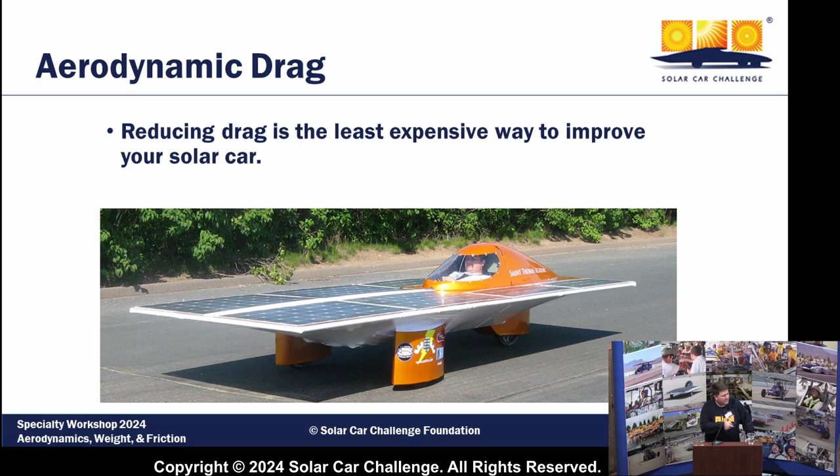These make a big performance change on your car.

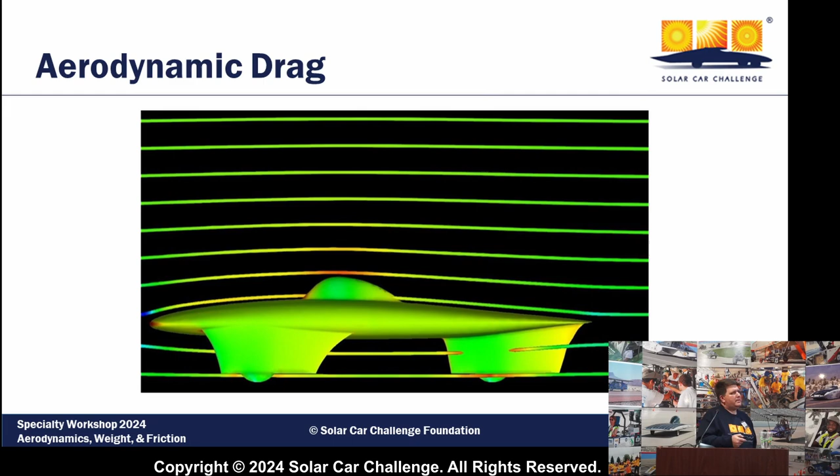So this is just one example of that. Some people will actually go and do some modeling on it. Do you have to do this? Not necessarily, but there are some guides you can look at. These come out of some of the engineering textbooks that you can find. If you find a book on fluid dynamics, you can find all sorts of gold like this.

Basically, drag always starts at the back of the vehicle, hence the name drag. It's a result of the unstable air as it wraps around whatever object is there. So you can see with some of these shapes, you actually get a smooth, what they call laminar flow, which means the air basically stays in line instead of going crazy all over the place, like these little swirls back here. So this is called laminar flow, where the air smoothly directs around it.

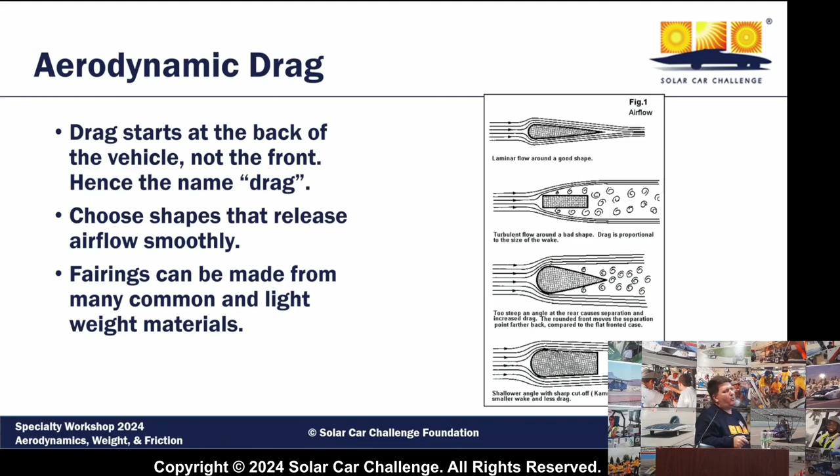When the air stays in line like this, it doesn't eat a lot of energy. When the air starts spinning in circles, you have to spend energy to make each one of these circles, which is why you have drag. That's all the extra energy because this is all turbulent and you're disturbing all of the flow of the air.

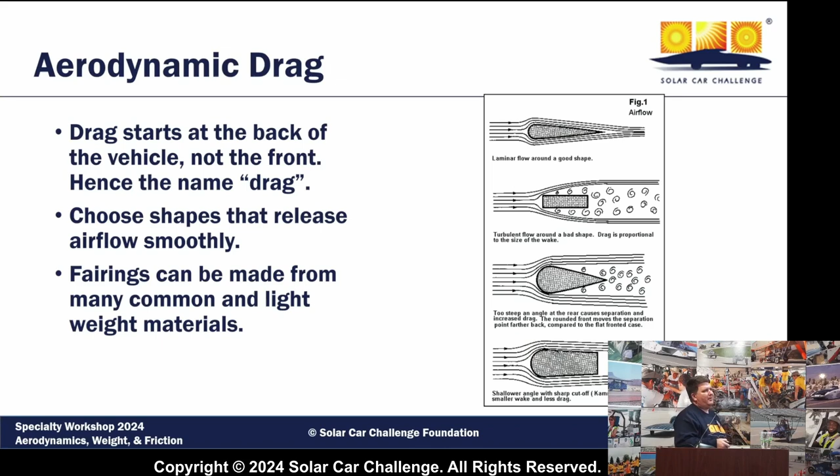So here we can see a couple different examples of shapes, and I'm not going to go into more specific details on this, but you want to choose shapes, if you're thinking about the overall design of your car, that will let the air release smoothly behind it without creating these vortices, eddies, and turbulent air behind it. Fairings are a very simple way that you can reduce some of the drag on your car.

More examples of shapes. Here you go with another set of things where you can look at the different shapes and the drag coefficient. The higher the number, the more drag that shape has. So just something to take away. Again, you can go into a fluid dynamics textbook, a mechanical engineering handbook, and find examples of this. Or, let me get with the digital age, you can Google most of this.

But this gives you an idea relative to things. It's like, well, if I just stick a giant cube in an airstream, I'm not that efficient. If I get some sort of streamlined half body, a streamlined body like this elongated teardrop shape, it's like 5% the drag of sticking a cube flat in the air. That's why you see so many solar cars with these kinds of shapes. That's your takeaway—it's meant as a rough guide.

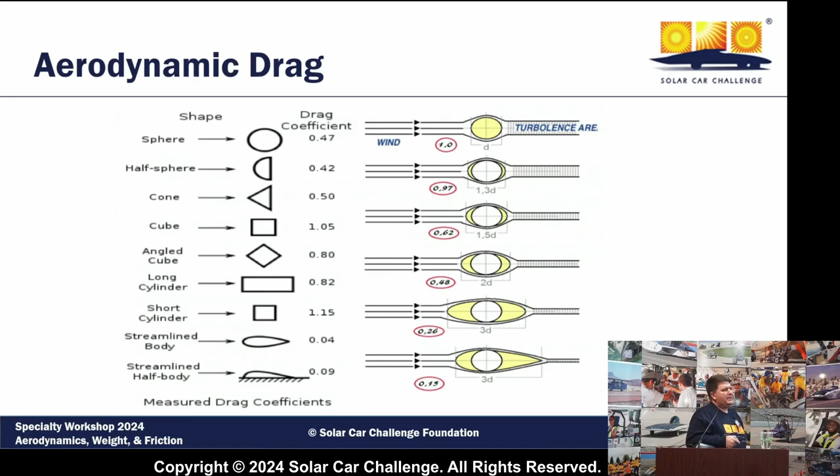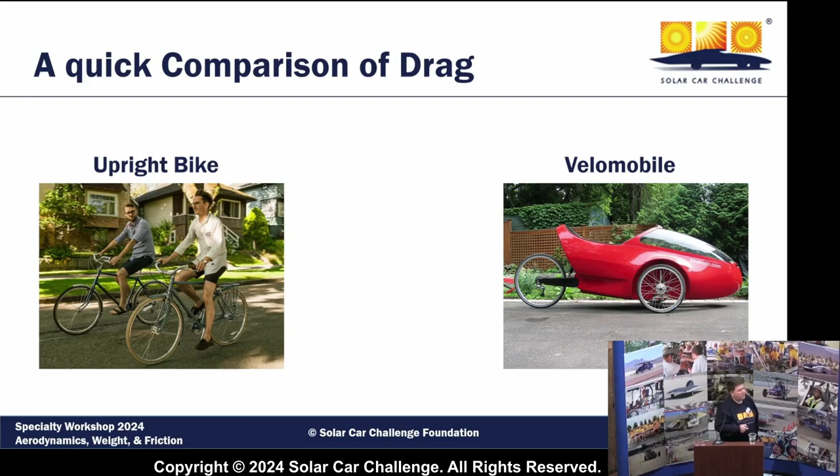Let's do a quick comparison of some drag. Let's look at an upright bike, random picture I stole from the internet, versus the velomobile. This is a human-powered vehicle that's meant to be super efficient, versus this, where I want to go ride by the beach and enjoy my afternoon, in a full upright position. Some actual numbers from that—let's take a look at it.

That's basically free energy that you're losing. All of this matters when you only get enough power to run a toaster off of your solar array. And by the way, even those really efficient solar arrays are only enough to run one of those 4-slot toasters, if you ever look at them.

I never realized how much power it takes to run a toaster, but there's my example for you. Just being upright in the air, you're losing a ton of energy. So just by being a little bit smarter about the shapes, you can save stuff. And that's only at 15 miles an hour.

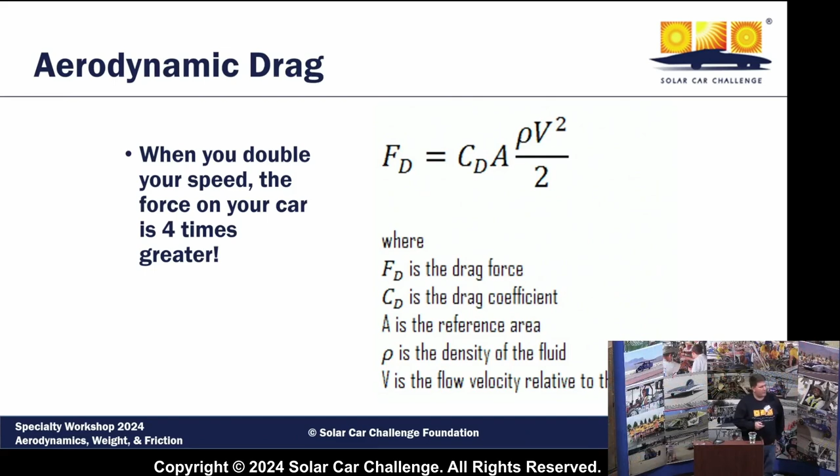How does aerodynamic drag work? Here's the formula for those of you interested in math. The takeaway, though, is it goes with velocity squared. So if you double your speed, you get 4 times the force, no matter what, holding everything else constant. So things to think about there.

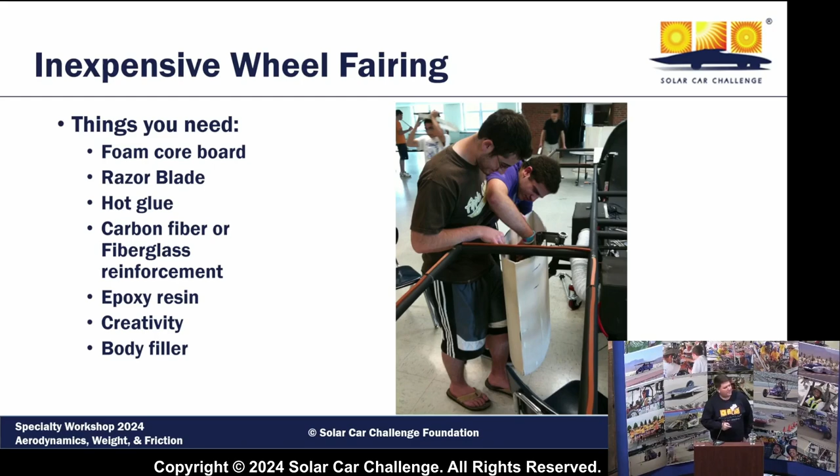You can then get a little bit of carbon fiber, which I have less experience with, but fiberglass I've done a fair amount of. You need some epoxy resin, as Mark always says, a little bit of creativity, and body filler. Automotive body filler—you probably want to find something light. You can use something like Bondo, but lighter is better for this.

Here's what they did. They basically took that foam core board—it's a little bit hard to see in this photo, you can see it better over here. They took the razor blade on one side and made a bunch of vertical slits on it. That allowed them to basically bend the board into the shape that they wanted, and they hot glued it. All of a sudden, you now have the start of a mold for a fairing.

And all you've done so far is take a $10 piece of foam board from Staples and some hot glue, and made some slits in it. Then they bent it to shape and glued it together. That's the start of it. If you get it wrong, you've wasted like no money and just a little bit of time fooling around with this.

After you've got the shape that you want, all you need to do is add 1 or 2 layers of—pick your favorite—carbon fiber or fiberglass on top of it just to make it a little bit more rigid. That's what they're doing here: laying the glass cloth on top of it and painting it with the epoxy resin. A note is that the epoxy resin will not eat the foam core in these boards—again, these cheap, like $10 presentation boards you can get from an office supply store.

Mark also has a little bit more information, and I invite you to go back to when he gave this presentation, where he talks about some of the tricks, like how you can squeegee out the excess resin from the fabric. Because again, your goal is to keep it light—the resin weighs a lot, and you just need a little bit of material on the outside to make it a little bit more rigid for you.

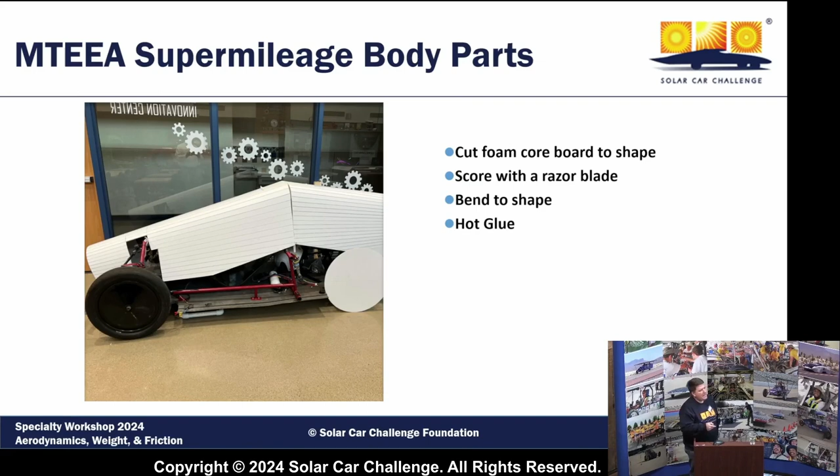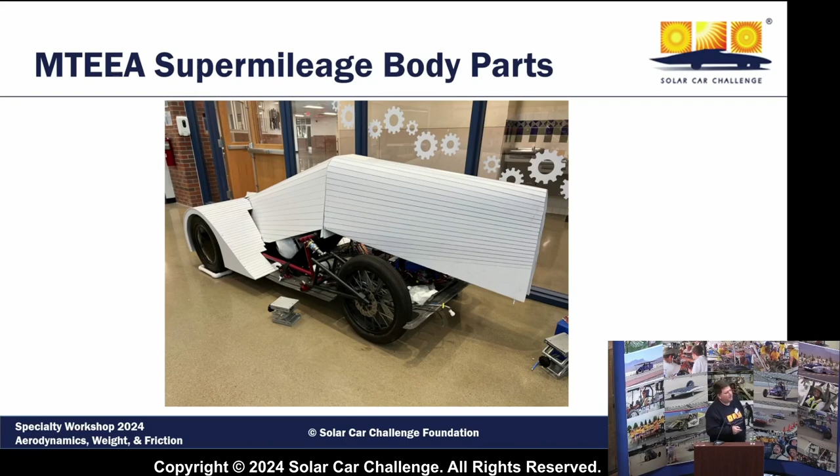They went back and it's like, okay, we've got the center part of the body on there, let's start working on the fenders. Same exact concept, hot glue and foam board. And they're getting this rough mold out here to be their highly aerodynamic body. Again, continuing on through the back. This school, St. Thomas Academy, does exceptionally well in these events with these high mileage, high efficiency cars. This is all they do to build it. Anybody can go build a body like this.

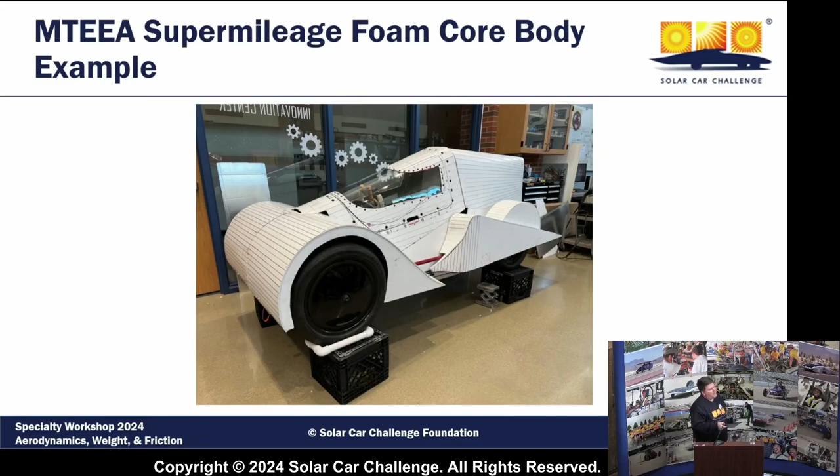You're talking about maybe $50 to $100 worth of material and some time with some hot glue and some razor blades. I mean, anybody can go do this. Same concept though, a little bit of fiberglass on top of it, afterwards a little bit of body filler, and what they went and did is they got vinyl decals to put on top of it. So here's them actually putting the vinyl wrap on there just to decorate it. Actually, I'm not even sure they did the fiberglass on this to make it even more rigid. I think they just kept it lighter and literally covered it up with vinyl decals. This was the end result.

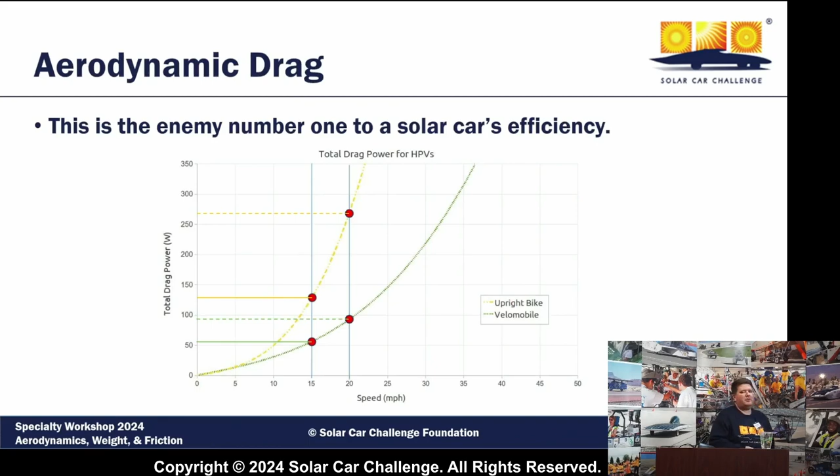So this is one of the easy cheats, and this is why Mark is saying that it's very inexpensive if you want to make your car more aerodynamic. We also talked about the shrink wrap that you can use on the bottom side of your car that'll just pull to things, and you can shrink it with a heat gun. So there are some things out there that make it very easy if you want to increase the aerodynamics of the car. So click back to this real quick. So you're on this green line on the bottom and not this yellow line up at top, just wasting energy on the track, plowing through the wind. So just stuff to think about.

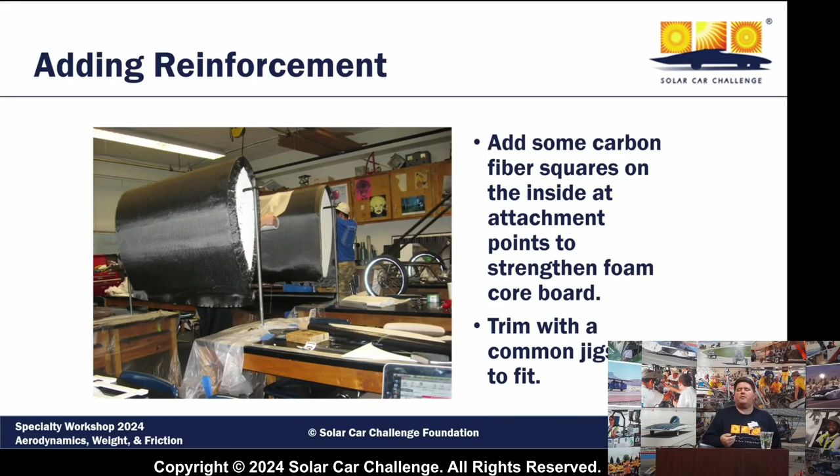I know that a lot of teams out there that are really advanced are making their own plugs and their own molds, and they're doing full carbon fiber composite, monocoque chassis, things like that. For a first-year team, don't worry about all that. You don't have to do that yet. But if you want to do some cool tricks that can lead you to a car, literally this car, which did exceptionally well, all they did for the aerodynamics was the shrink wrap and some foam board work. Admittedly, they did a little bit more on the top of the car, and I think I left the picture out of order for that.

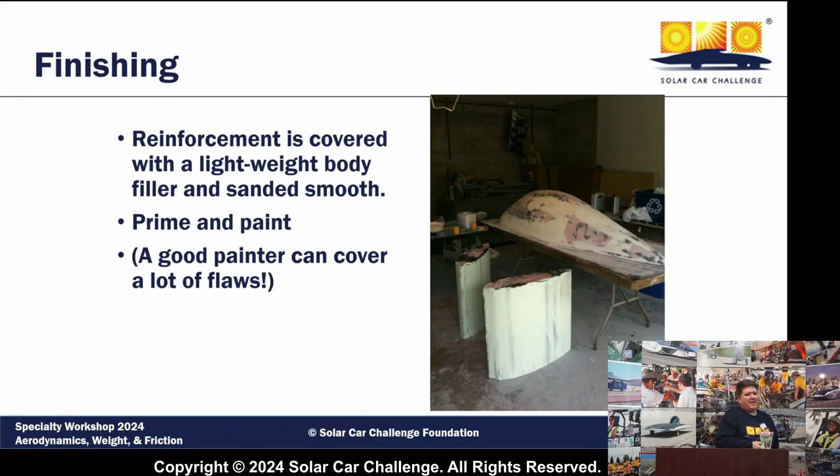Yeah, here you go. Here's where they went back after they glassed them, and they put a little bit of Bondo or body filler. I'm not sure which lighter body fillers there are out there. I'm used to using Bondo. They primed it, and they had a really good painter, and as Mark says, good painters hide a lot of flaws. So you get this car that just looks amazing out there on the track.

Again, it's a bunch of foam board from an office supply store. So that's aerodynamics. Let's talk about weight for a second.

Again, I explained to you that when we talk about rolling resistance, there's a number of factors that influence it, but none more than weight. Rolling resistance is simply how hard it is to make your car move forward on a level surface. If you were to take your car out to a parking lot and get one of those fishing scales where you can weigh a fish, hook it up to the front of the car and pull it, you can measure the rolling resistance. And honestly, that's something you can do if you want to see if an improvement you're making actually affects things, like lubricating bearings or changing the type of wheel and tire that you've got.

Or, you know what? Let's put 50 pounds of sandbags in the car and see how much that changes the rolling resistance. If you're curious, you can see it right then and there. All it takes is a flat surface and a scale, maybe some ropes tied to the front of your car. Heavier cars always need more energy to accelerate. You have to pick it up and carry it with you every time you move up a hill.

But again, I already said this in the beginning, do not reduce weight at the cost of safety. And I put this in red, bold, and underlined it. Things will break. If you make things too light, they will break. And that will ensure that you are not successful at this event. I cannot stress this enough. When in doubt, early on, and if you're not going to have a lot of time left for testing, overbuild a little bit. It will do you a favor when you come to the event because your car will just be able to stay out there on the track, even though it may not be as efficient as it could possibly be.

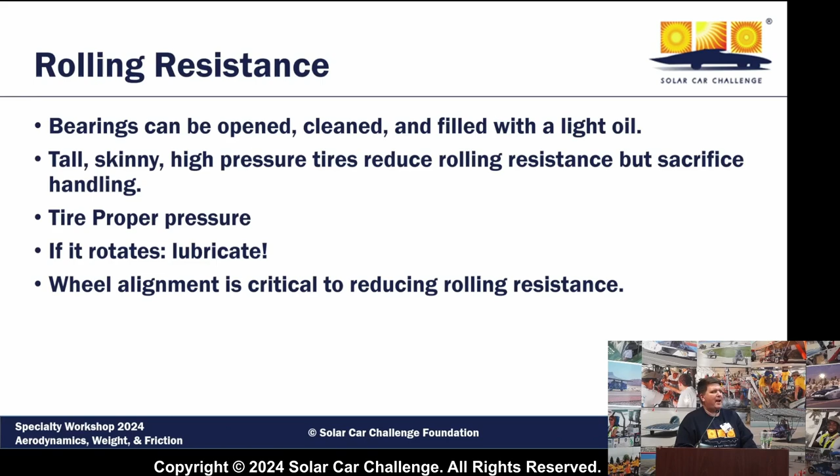And this last one, wheel alignment. If your wheels, as you're going down the road, are pointed like this, you're going to have a lot of freaking rolling resistance. And all that takes, in the simplest form, is two tape measures and two people looking at it to get them from being like this to being parallel. There are better ways than two tape measures, but if you wanted an early approach, and I know a lot of teams out here have experience with other cars and racing, there really isn't much excuse for wheel alignment being off, because everybody can check that and fix that. Unless you designed yourself into a corner and made it so there's no way to actually align your wheels, in which case, well, I can't really help you. That's it. That's what I've got on my rants, weight, and aerodynamics.